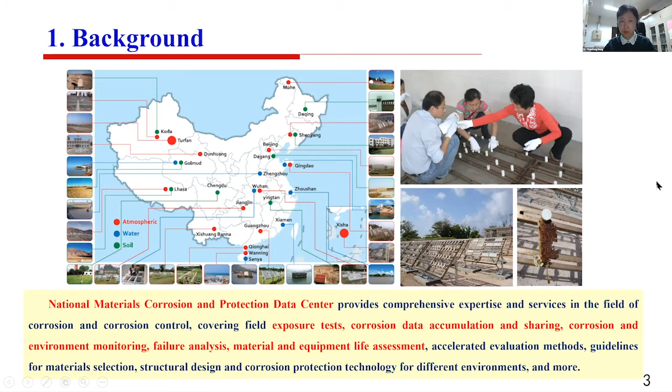Most of our work involves outdoor exposure, so you can see the specimens for the atmospheric corrosion test, and we also use different kinds of samples to do accelerated corrosion tests in the laboratory. That is the background.

Within the recent 10 years, we know there are various types of corrosion. The reaction process may cover different scales, including length scale and time scale. So we need to focus not only on the corrosion experimental data, but also use more modern methods or other techniques to improve our study.

Based on the requirement and the multi-scale challenge, I think we need to lead our group to focus on integrated computational corrosion. That's why I've spent about 10 years focusing on this area. The key issue is that we need to exchange, integrate, and evaluate the correlation and validity between the experimental and computational data - this is very important.

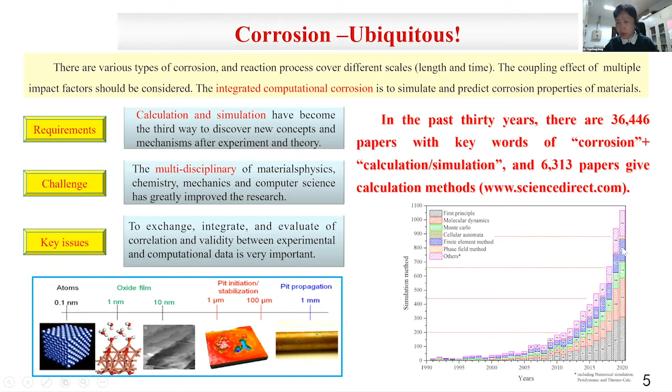From this figure, you can see the increasing number of papers very clearly. That's why we chose this method.

Another background is that from the physics or chemistry field, we wanted to use new methods for our study. That's why we tried to create a knowledge map of the mechanisms and different simulation methods. From this map, we can see some hot point issues in corrosion.

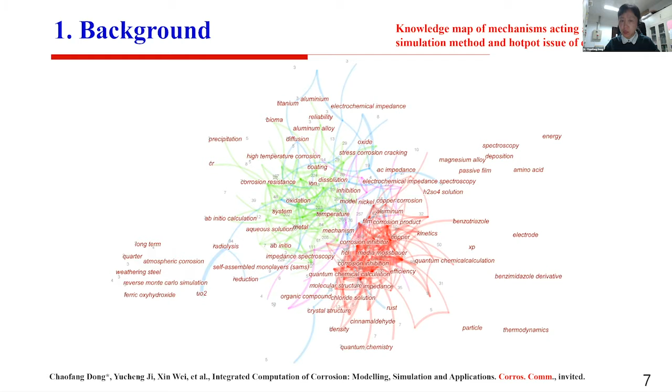The red one is about corrosion inhibitors, the green one is focused on oxidation, the blue one is about atmospheric corrosion, and others relate to electrochemical impedance. From the knowledge map, we can understand the relationships, and it's easy for us to identify which area is a very hot topic.

In recent years, everyone knows that in the US, material genome is very important in material science and engineering. In China, we call this material genome engineering.

Based on this background, we think we need to focus on building multi-source data. For example, we need to use the mechanic data, the electrochemical data, also the microstructure. We need to try to put all the data together to make a decision, or analyze all the data related to the performance. That's why it's very important, rather than relying on a very small amount of data samples for the conclusion. That is one change in material research and development by the MGE method.

Another one is about the data of the material structure and properties that need to be screened and modeled with the help of computers. I just put two Nature papers on this slide. You can see one is about sharing data in materials science, and another one published by Professor Li, called that we need to share corrosion data. So after that, if all of us can share our data together, maybe we can find some new mechanism.

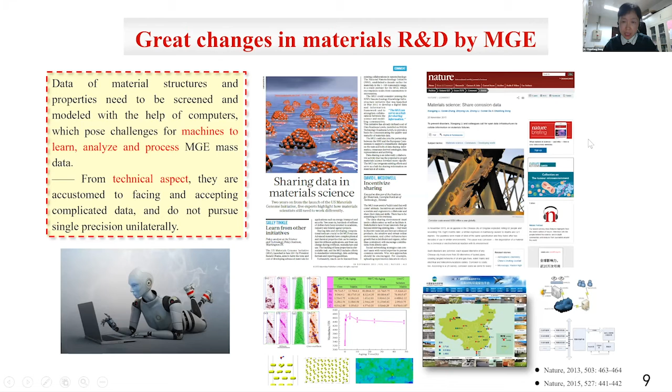So the third one is about the experimental tools for the automatic in situ method, and also some computational tools for the multi-scale modeling and the data analysis tools, which are very important parts for the MGE study.

Based on this, I think, what can calculation do for corrosion? Maybe we need to look from the thermodynamic, and also dynamic, and the electronic aspects, from these three parts, maybe we can know something new, by the meaning of the integrated computational corrosion.

I think maybe the cross scale, the generate additional information and experience lead to the model change from the known to unknown. Maybe the creative and new things are very important for the corrosion mechanism.

And with the tendency, we need to use new computer techniques, for example, self-learning and optimizing for the corrosion resistance.

And the key point is we need to use some committee to get the standard. After this standard, we can share the data. Without that, it's very hard to do.

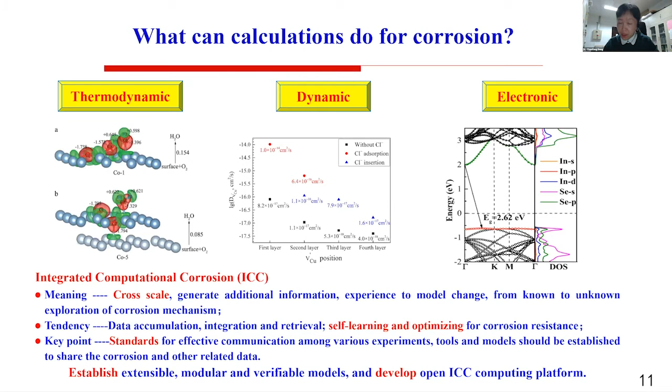After that, we want to establish extensible, modular and verifiable models to develop an open integrated computational corrosion platform.

Based on this, because of the time limitation, I want to show some examples of our work. If you want to know more in detail, we can use email, or after this conference, we can use something like Skype to communicate more.

So the second part is about integrated computational corrosion. The first one is about using DFT calculation to get the Pourbaix diagram. From the reference, the Pourbaix diagram can be calculated by different kinds of software, for example, the Materials Project, Thermo-Calc, and also pymatgen.

We also know many groups doing work in this area, for example, Dr. Huang Liangfeng and the group of Professor Scully, who also do very good work on this part.

In our group, we want to use Python software to face the challenge. One is the binary and ternary alloy system, and we want to use the method to calculate some complex solution systems. So how to get very fast and efficient results? That is what our work wants to serve.

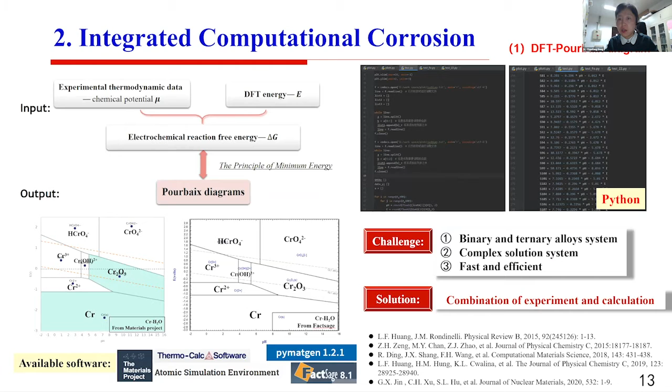With this basis, we also made our software. You can see on the right hand the Python code, and after that we just follow several steps. The first one is the chemical potential of the solid phase, and we also use different experimental chemical potentials combined with calculation results. That's why we can solve some very complex systems.

So the chemical potential of the aqueous ions from the experimental chemical potentials, we use this equation, and after that we also try to write down all the equations and reactions during this system to use DFT to do the calculation. The results show we can do the ions, chloride, and H2O system. So that is a new aspect in our group.

So this is from the thermodynamic method. The second one is about passive film stability. This one is guided by Professor Digby Macdonald. So first, we use the electrochemical test and also use the PDM model to do a lot of analysis based on the experimental results.

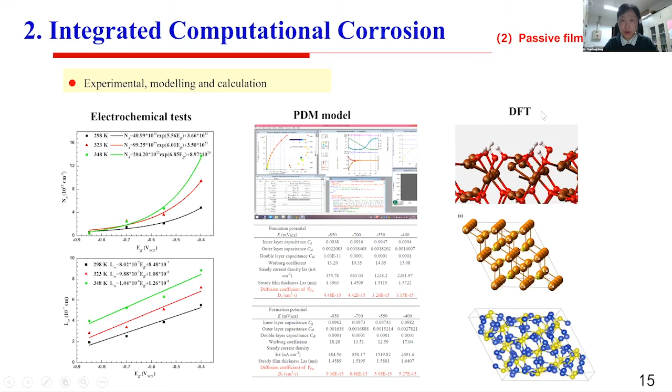After that, we established several kinds of passive film models with the point defect inside it. After that, we can get the corrosion resistance and the changing of the film formation stability. We also focus on the different kinds of semiconductive character.

From the table, we know the diffusion coefficient from the electrochemical method, this list is from the PDM model, and this one is from first principles calculation. The results show very good consistency with the diffusion coefficient of the copper vacancy being in the range of 10 to minus 15 to 10 to minus 14th power. That is very good for our experimental temperature in this system.

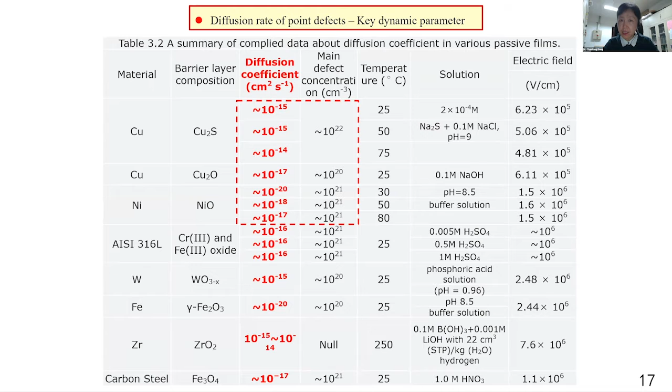We also published a paper in Corrosion Science, and after that we tried to use this method to calculate different kinds of passive films. In the various passive films, the diffusion coefficient changed greatly, so we can use the diffusion rate of the point defect as the key dynamic parameter.

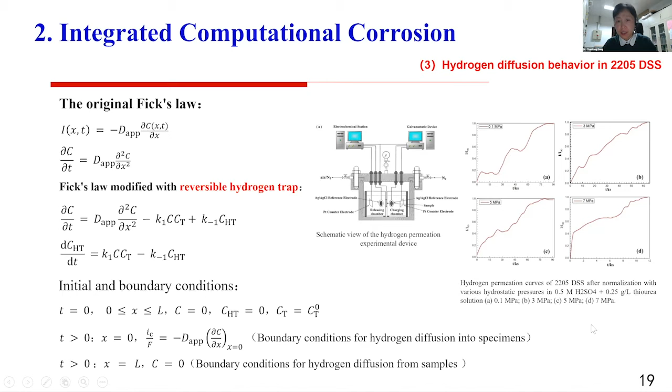This task belongs to work done with Professor Macdonald and Professor Mirna. We try to use the original Fick's laws to establish this equation, and also use the reversible hydrogen trap to modify these laws.

After that, we do a lot of tests with the parameters and the result of the hydrogen permeation, this is from the experiment. Then we use the COMSOL software to establish and simulate hydrogen diffusion inside the stainless steel. After that we can get different kinds of boundaries to determine the hydrogen concentration distribution with respect to time along the thickness of the samples.

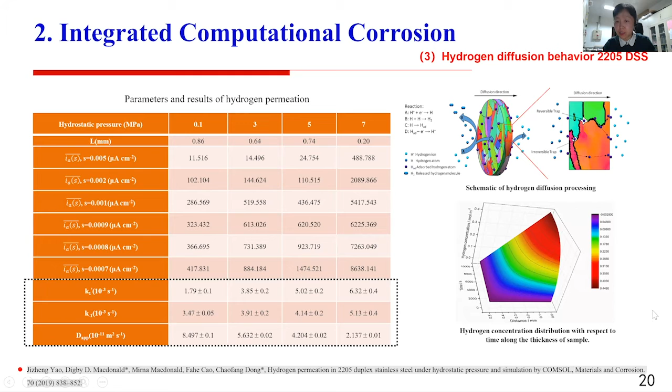For the time limitation, this part is just very fast to get through.

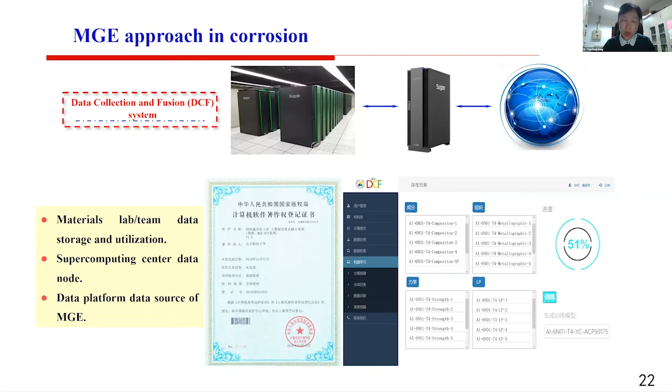Within the recent 5 years, we already used a lot of the supercomputation center, and we also set up the software. Sorry for the conference time constraints.

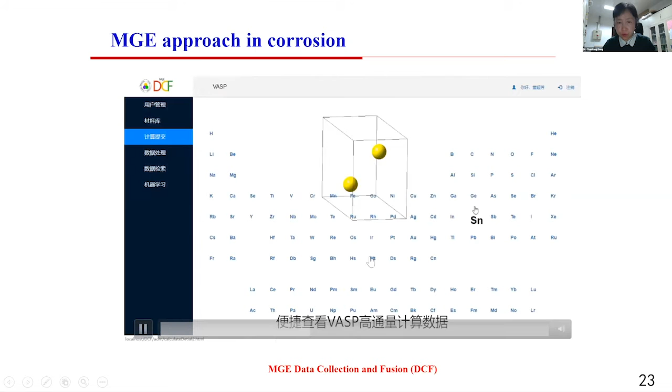We didn't change the software into the English version, maybe next time. We also calculate all the elements in the tables, and within the database we give a lot of details for different kinds of materials. Within this system, we give the calculation data for mechanics, microstructure, electrochemical properties, and some machine learning methods are also within this software.

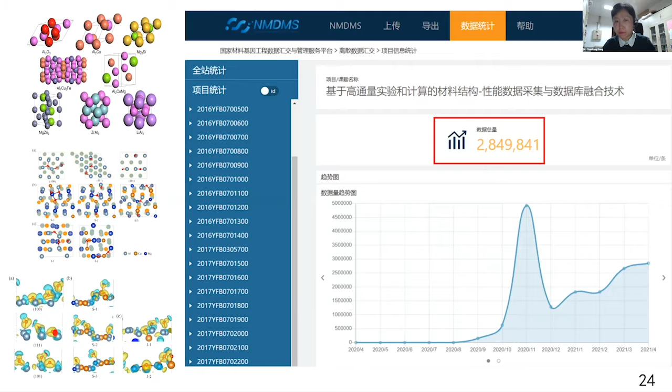You can just submit your POSCAR and your POSCAR file, and you can get some estimation. So we already have 2 million data points in this system, and maybe after this we can use some machine learning or other computer tools to get more results.

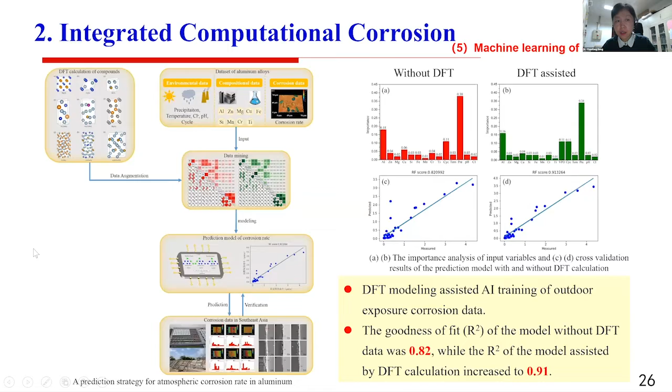For example, the aluminum alloy, there are maybe 2000, 5000, 6000 and 7000 series. We can use the calculation as input and get very good results. The error between the predicted and experimental corrosion rate of the aluminum alloy in Southeast Asia is less than 15%, so that can be used.

And the third part, 3 minutes.

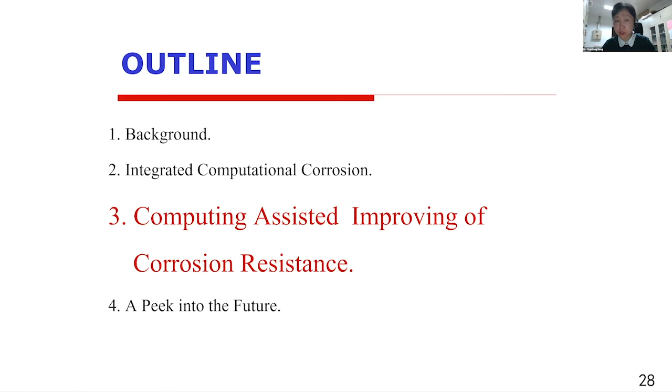So for other speakers already mentioned about the inhibitor, so this one just uses the calculation and also the thermodynamic, also some molecular dynamics, and we use the experimental to verify our result. So that follows about all the MGE.

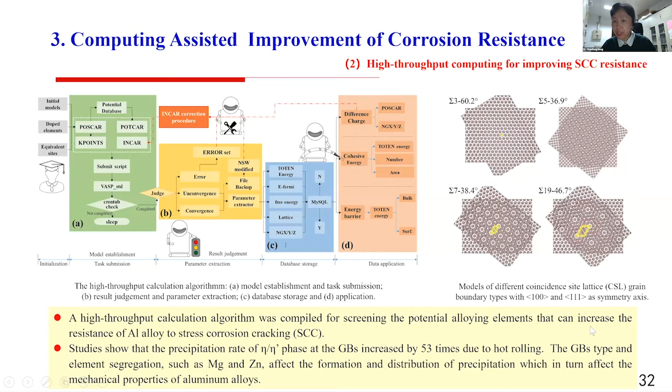This one is about the high throughput calculation. We just use it to screen the potential alloy elements that can increase the resistance for the stress corrosion cracking.

This one is about the different kinds of dislocation moving, so we can investigate the grain boundary and also the segregation. For example, the eta and eta prime phase precipitate and the grain boundary, the dislocation pinning effect of the grain boundary is no longer observed, and also the strength of the grain boundary changes a lot with the interaction of the hydrogen atoms, everything changed.

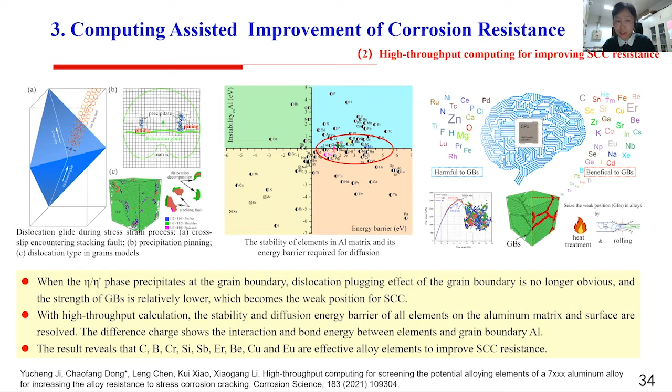If you want more details, you can see our papers on the corrosion science.

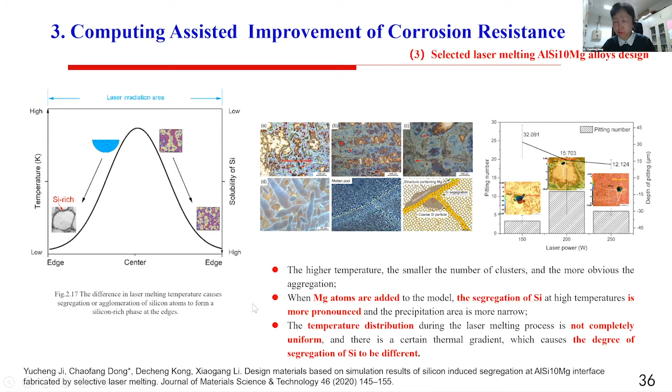So this is about the selective laser melting design. For all parts of the result calculation, we use the experiment to verify whether it is true or false.

The last part is a peek into the future. So this is our part from the atomic simulation to the engineering part, from the calculation line, and also we use experimental work to do the verification.

This is a different challenge, and we want to use different kinds of solutions. And now we are looking for cooperation.

The first one is about the Pourbaix diagram. We want to use Professor Digby's kinetic stability diagram to do the modification.

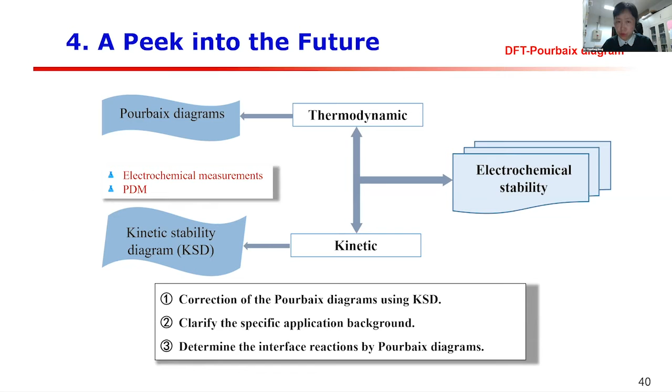And the second part we look for cooperation is about the reactive molecular dynamics. We need the force field of the aluminum, carbon, hydrogen, oxide, and chloride.

So in the future, if you're interested in this field, we can make more communication.

So the question is very, very challenging. So it's very complex and very cool.

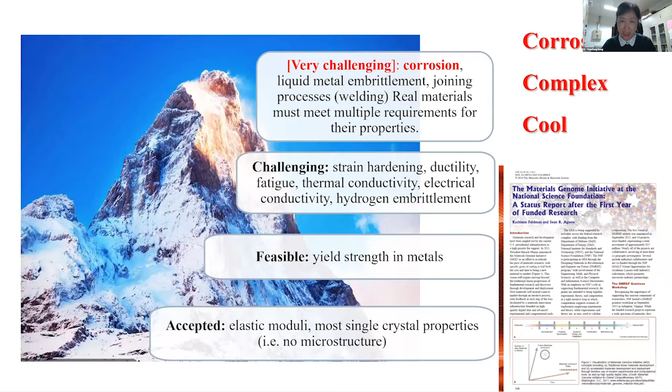Thank you very much for the excellent presentation. Because of the time, I just have one quick question. Is there a standard or guideline for effective application of integrated computational corrosion analysis?

Thank you, Professor Dong. Can you recommend any book or guideline for researchers to get used to your research method in terms of corrosion computation?

Now, most of us use the book from the ICME that belongs to the MGI program. So maybe in corrosion, we want to just organize a group. We can make our own books, but the standard is very challenging.

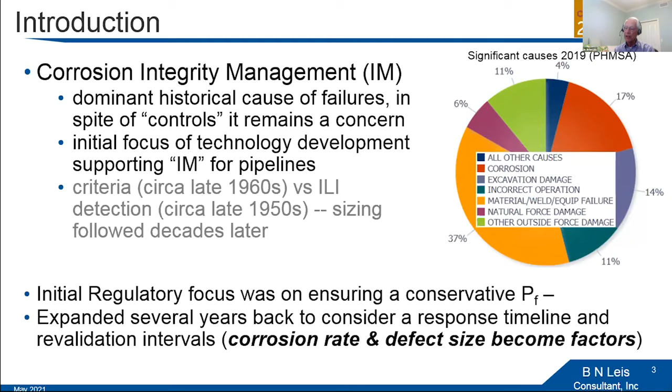Not surprisingly, corrosion initially was the major cause of failure, and it was the initial focus of technology development for integrity management for pipelines. The initial regulatory focus was on ensuring a conservative failure pressure, and recently that was extended to consider response time and revalidation intervals, which opened concern for corrosion rate and defect size.

By way of explanation for why these regulatory drivers cause problems, consider that the failure pressure is a function of a constant, basically the reference stress in the pipe geometry, and the effect of the defect. If you change one side of this equation, you have a corresponding effect on the other. Historically, by making things conservative, the bottom line was that decreasing the failure pressure through conservatism effectively decreases the defect's length. But once you consider the influence of defect length, a shorter defect length gives rise to a longer life. So you really have to have these two parameters in balance. We need to keep the failure pressure and the defect size in balance, and that demands a very accurate solution. You can see that in the context of the chart here. This data point represents a point.

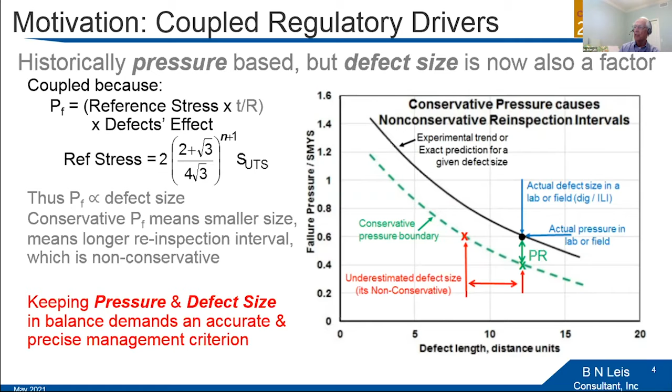If I reduce the pressure by the amount indicated and then track up the green dash line, you see that I'm substantially shorter in terms of the defect length. So there's a clear concern in this context for that influence. I want to point out that I'm using a reference stress here that's a function of the UTS and the strain hardening exponent, which has a theoretical foundation in power law plasticity for those that are interested.

Talk briefly now in terms of cost, safety, and conservatism. I'll note that any conservatism introduced to offset model error, which is why it was initially introduced, does not really add any safety or reduce risk. It simply offsets the model error. So the costs associated with model error management can be removed without altering, much less jeopardizing, the safety of the system. The key cost management driver here is an accurate, precise solution that eliminates the need for conservatism. The bottom line from the prior chart was that you could not apply a margin of safety prior to doing the analysis, but if the analysis is done correctly, you can add that margin of safety afterwards. The objective of our work has been the development of accurate, precise, mechanics science-based models of failure pressure to end the money wasted on offsetting model error.

I'll talk briefly now about level 1 assessment criteria, focusing particularly on issues later in the context of idealized versus real corrosion, isolated corrosion versus complex corrosion, and detection and sizing. Throughout our work, the premise has been that if a criterion is inaccurate for an idealized isolated feature under well-controlled testing, then such criteria don't provide a sound basis for technology development. That's really been fundamental to our path forward.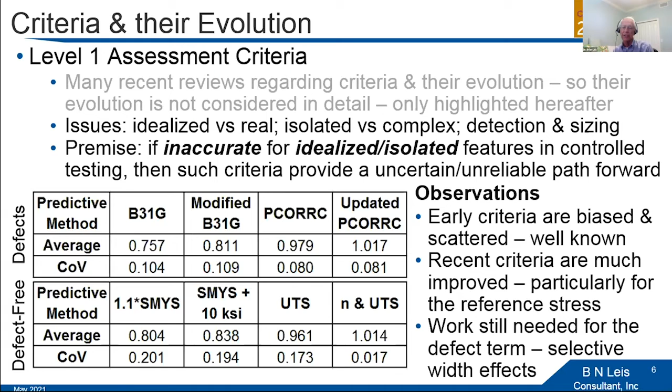If we turn our attention now to defect-free pipe, remembering that the failure pressure is a function of the pressure of failure of the defect-free pipe, coupled with the effects of the defect, it becomes apparent that for these early criteria, much of the bias evident here is a consequence of the bias present in the reference stress. In comparison, if you look at the more recent criteria, you see that the bias is much reduced, and the scatter is significantly reduced when we use a failure criterion for the reference pipe that's a function of the UTS and the strain hardening exponent. So the observations are as noted here: the early criteria were scattered, that's well known, and the recent criteria are much improved. But if we dig into the details, we quickly see that there's work still needed in terms of the defect term, particularly in regard to selective width effects.

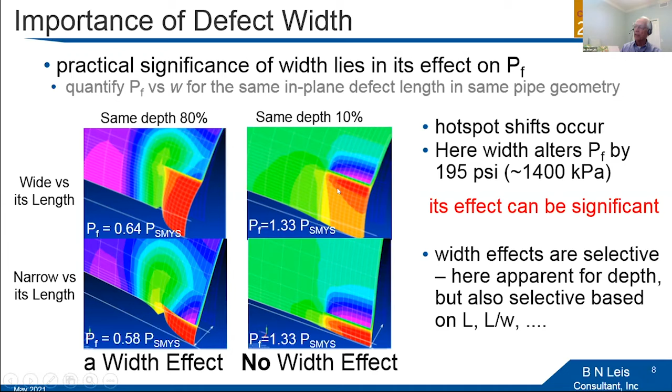It has a significant effect. The width effect is a function of depth, but the width influence is selective in regard to the length — selective in regard to the aspect ratio, that is, length to width, and other parameters. So width can be a very complicating factor, and unraveling why turns out to be relatively simple if we contrast two scenarios: wide and deep versus wide and shallow.

You see here a relatively gradual transition through the full wall into the part wall of the pipe. Whereas here you see a very significant transition, a very sharp change across that interface — coupling bending and membrane tension here, where it's largely membrane tension there. That's why width is a factor. Historically we've ignored it, but as you can see, width was a significant influence, and next generation criteria will explicitly embed width effects as we move forward.

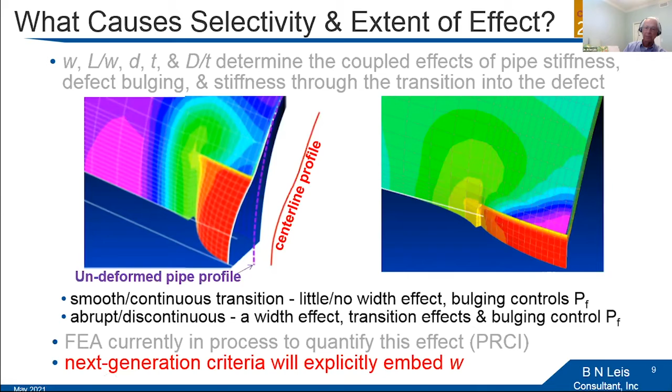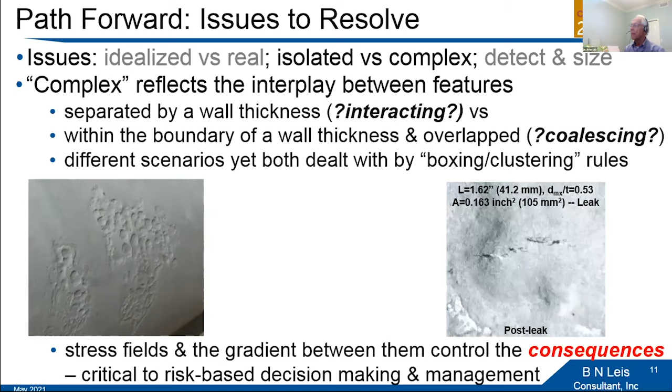I'm adding two plots or charts to this, which show a feature very similar to what you see in this image here, where we have overlapped pits - here's a pit and here's a pit. These are really pits within pits. You see a lot of little pits here. These pits are growing by virtue of smaller ones giving rise to a bigger one. This is not quite a full wall thickness - it's a significant barrier, if you will, between this feature and this feature coalescing or failing in a shared way.

Notice here that the maximum depth, in this case, is 0.53. The same is the case for this pair. In this particular case, this is a slightly shorter feature compared to this one. This is a view pre-rupture. As you can see here, leak paths have formed, and this is a post-leak image.

This combination leaked because the barrier between these two features was relatively shallow and they could coalesce. As they coalesce, they fail at a lower failure pressure. But because these two features are relatively resistant to failure, they don't coalesce, and they gave rise to rupture instead. So the significant difference here is a leak, which is a relatively small release through these very, very tiny cracks. Remember, this feature is just 2 inches long, or a little less than 2 inches long. So this is a critical element of the problem.

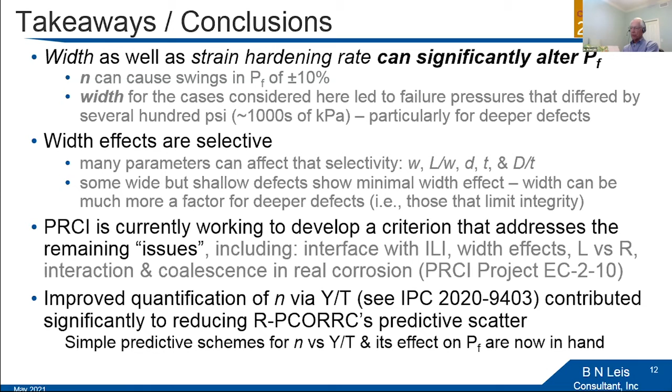And with that, Frank, I'll try and get you back on time. Thank you very much, Brian. That's a very good presentation. Right now I have two quick questions for you.

The first question is: what is the length-to-depth ratio to classify a defect as localized? That's a good question. The defects that tend to fail at the highest failure pressures tend to be small, physically small, and geometrically similar in shape. A relatively small pit can be very deep and still not fail, so the length-to-depth ratio in that context would be close to 1.

Another question: will temperature affect the pressure containment ability of pipelines? Most pipelines in service are buried, and they're moderated by the ground in terms of temperature, even though they've got a warm product flowing in them. Temperatures tend to be less than 140 degrees, more or less. Temperature is not a big factor under those circumstances. It does affect corrosion rate, obviously, but in terms of failure pressure and mechanical properties, it's not a big driver.

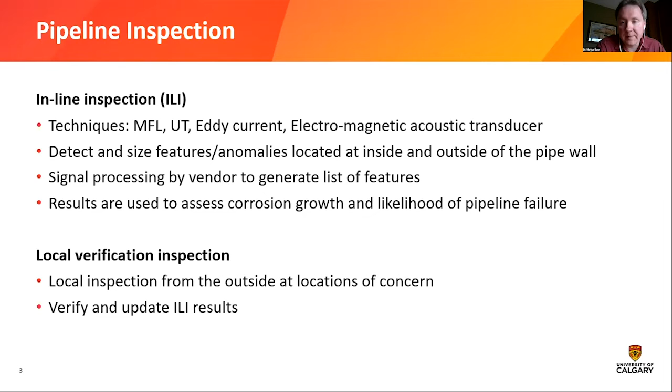So this is typically the starting point when we do the analytical integrity assessment, that we have these Excel tables available from the ILI vendors. Then every few years, as we do a new inspection, we get a new table. Based on this series of tables, defect matching needs to happen, and then we can infer what the corrosion growth is, and assess how critical the defects are.

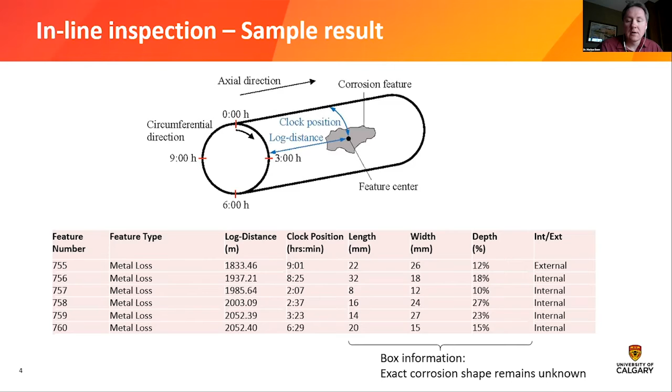So then based on this, we now need to go to the analytical assessment, where we have two things to do. One is we need to do the corrosion growth analysis. So we need to assess what is the current corrosion size, what will be the future corrosion size, and then assess how critical the defects are, or when do they become critical. How much time do we have to follow up in terms of inspections and or repairs?

In this feature assessment, we have different ways of doing this. As we saw earlier, the level 1 assessment is some sort of deterministic or code-based. It is usually based on conservative values, and it just gives you a yes or no answer. Is the defect acceptable? We can still leave it in. We don't need a repair. Or it is very close to being critical, so we have to follow up. That is one method where we're not really directly addressing the uncertainties.

Now, if we want to do a step better, we can do it reliability-based. So for each defect, and then for entire pipeline sections, we determine the probability of failure. So now we're going away from a deterministic analysis, or an analysis where we use fixed numbers, to more like a probabilistic analysis, where we really want to describe explicitly what are the uncertainties. Then we use the failure probability and compare it with a target failure probability. And as long as we stay below, we say the defect is acceptable. If that's not the case, then we have to follow up.

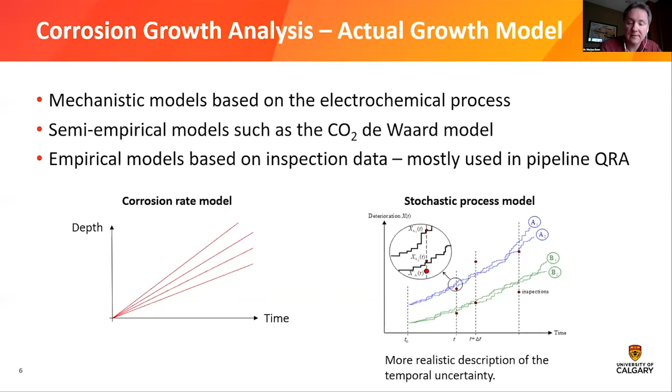And then we have uncertainty due to inspection errors or measurement errors. There we have several types that are already built into that list of defects we obtain from the ILI vendor.

We can have detection errors. Out of all the defects in a pipeline, not all of them are detected. To describe that probabilistically, we use a so-called POD, probability of detection curve. As a defect gets larger, the probability of detection is very high, so there's a high chance we will actually capture those. Usually POD is very low for defects that are very small. That's relatively good for us because the smaller ones we are not as worried about from an integrity perspective.

So we have to keep in mind the list of defects we have is not complete. We're still missing some that are not included.

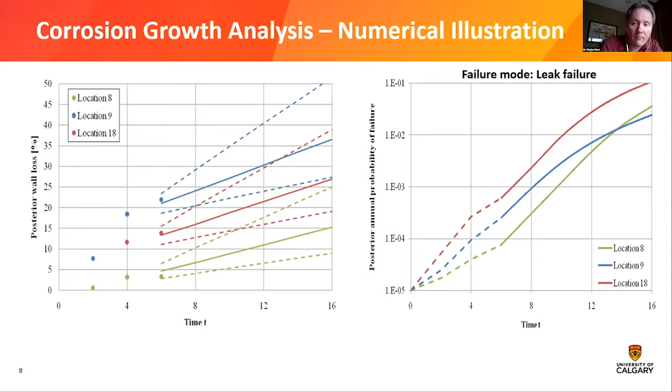Markus, you have almost 2 minutes. That's good, I have 2 slides.

The previous slide showed the reliability-based version. We can do something similar, risk-based, and use that risk in a life cycle analysis, or even a little bit shorter than a life cycle analysis.

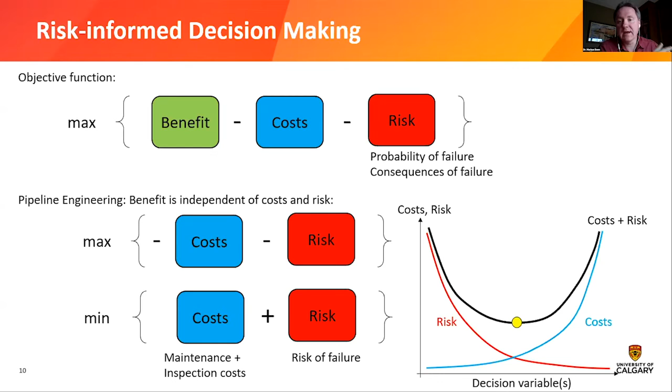Based on this point, we can make decisions in terms of when to go out and inspect again, where to make repairs, and if it is worth having follow-up inspections.

Conclusions. In general, from the industry, there's a clear trend towards quantitative risk assessment. The objective is to minimize the total life cycle costs from an operator perspective while still keeping the pipeline safe, which is often used to prioritize where to go out and make repairs.

Those defects that have higher risk, you prioritize first. Those that have lower risk come a little bit later.

When it comes to corrosion growth, it is typically or primarily inferred from ILI results. I wish there would be a stronger integration of advanced corrosion models, like mechanistic corrosion models, into the actual risk assessment. I've shown you some very basic examples, using relatively simple probabilistic models. We don't really consider the actual mechanism behind it. There's still a huge gap, and I hope in future we can close that.

From a temporal uncertainty perspective, we should avoid corrosion rate models, as they don't really accurately present the temporal growth over time. It is possible that the ILI-measured growth appears negative, due to the strong influence of measurement errors. That doesn't mean there's no growth; it just means the measurement error is so significant that there can still be a small, or even quite significant, positive corrosion growth of the actual defect.

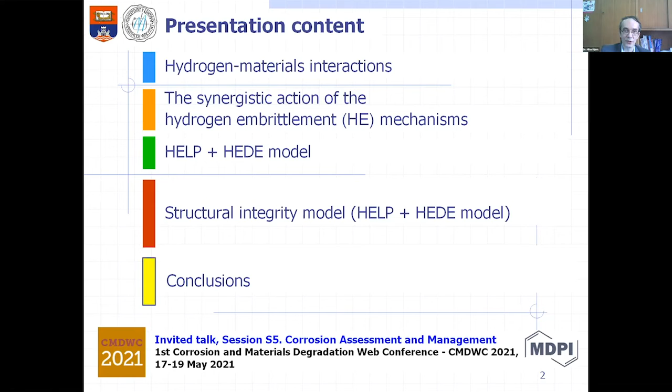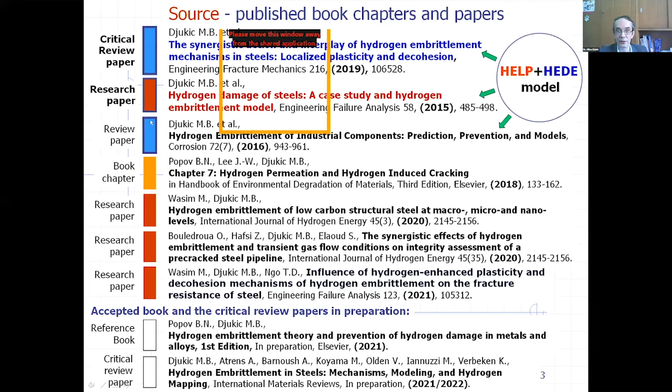Here are the sources and references related to this presentation. I wish to point out the book for Elsevier in preparation, to be published in 2021 together with Professor Branko Popov, about hydrogen embrittlement theory and prevention of hydrogen damage in metals and alloys. Also our future paper in International Materials Reviews with a group of top scientists related to hydrogen embrittlement, also in preparation, and 3 important papers related to the HELP plus HEDE model.

Hydrogen materials interaction is a complex term, but if we talk about preventive maintenance and maintenance engineering, they are mostly interested in hydrogen-assisted cracking. What is hydrogen-assisted cracking? It's hydrogen-assisted degradation of crack propagation resistance by assisting the microscopic process that constitutes crack tip advance. Due to the degradation of crack propagation resistance, the components finally fail. On the other hand, hydrogen embrittlement is restricted to the perception of the precise nature of hydrogen-assisted mechanical degradation, and we have various models on which the degradation of crack propagation due to hydrogen embrittlement exists.

In our recent review paper published in Engineering Fracture Mechanics, we proposed a 5-step approach in analysis of hydrogen materials interaction, which consists of phenomenological analysis of hydrogen-related degradation phenomena, and different experimental and modeling approaches in order to finally reveal the hydrogen embrittlement mechanism active in a particular material. Next is the analysis of hydrogen source and entry, where corrosion is the main process which provokes hydrogenation of material during the exploitation of various industrial components.

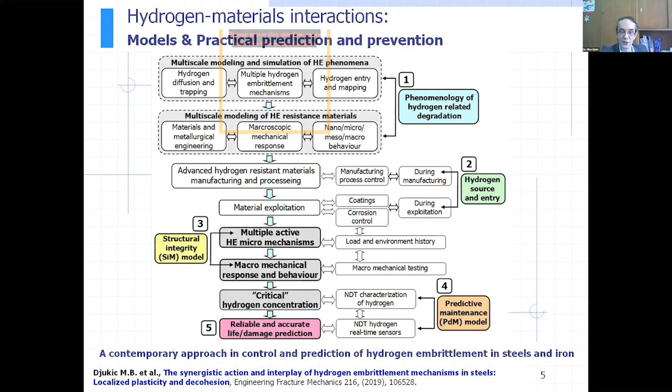Based on such analysis, we developed a structural integrity model based on the multiple active hydrogen embrittlement mechanisms active in steels and other materials, connected with the macro mechanical response and behavior upon reaching the critical hydrogen concentration in material. Future work will be focused on a predictive maintenance model based on NDT characterization in order to provide reliable and accurate life damage prediction of components exposed to hydrogen embrittlement in various industrial plants. So we have a missing link between numerous phenomenological research of hydrogen metal interaction and practical and predictive industrial models.

We could say that a fully developed and practically applicable predictive physical model still does not exist industrially for predicting and preventing hydrogen embrittlement. The synergistic action in the hydrogen embrittlement mechanism was recently divided into two major models.

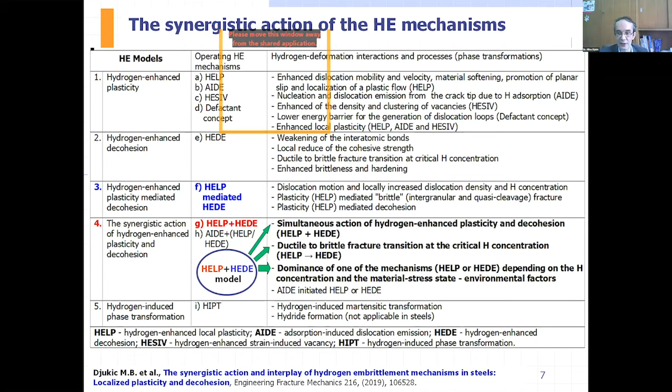The first is the HELP-mediated HEDE model, about the synergy of hydrogen-enhanced localized plasticity and hydrogen-enhanced decohesion mechanisms. Our model, HELP plus HEDE, proposed in 2014 and 2015, is now relatively well accepted. It indicates the dominance of one mechanism, HELP or HEDE, depends on hydrogen concentration, material-stress state, and other numerous environmental factors for practical application.

In 2009, Professor Robertson and a group of authors from the United States pointed out that it's more feasible that in metals several hydrogen embrittlement mechanisms operate simultaneously, but one of them dominates under specific conditions. Recently, in 2021, the synergistic interplay of both HELP and HEDE mechanisms in different types of steels was confirmed by numerous experimental and modeling evidence.

We could summarize that the dominance of these two mostly accepted mechanisms depends on numerous factors. I will just list the problem. We have numerous influencing factors like steel microstructure, source of hydrogen, hydrogen local distribution and trapping processes, also the local hydrogen concentration and distribution, and reaching of the critical hydrogen concentration.

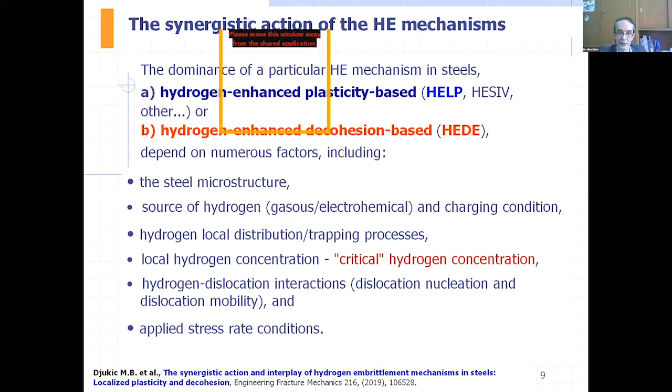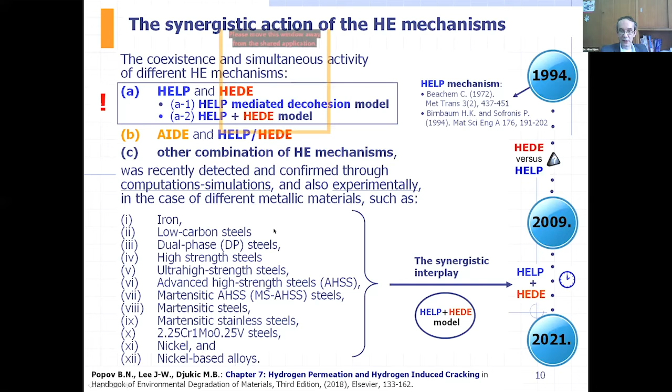Now I will talk about the difference between these two models for the synergistic action of HELP and HEDE mechanisms: the HELP-mediated decohesion model, and the HELP plus HEDE model.

And we have here numerous papers, up to today, which confirm the synergistic action of HELP and HEDE mechanisms in steels, but also in other materials. So here is the definition from 2014, which we further developed in 2015, 2016, and 2019.

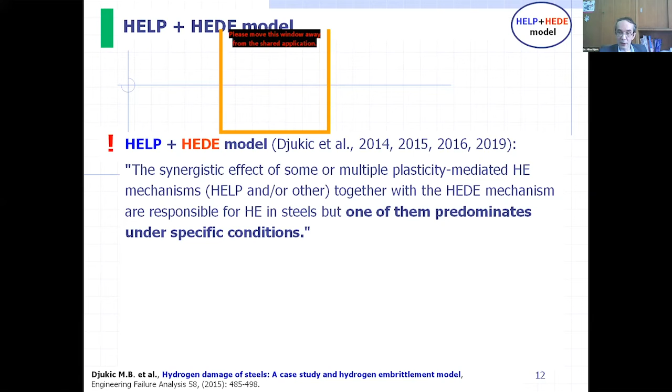The HELP plus HEDE model: the synergistic effect of some or multiple plasticity-mediated hydrogen embrittlement mechanisms, HELP or others, together with the HEDE mechanism, are responsible for hydrogen embrittlement in steels, but one of them predominates under specific conditions.

You can see here the difference: the HELP-mediated decohesion model states that the major mechanism always active is the HELP mechanism, and that initial activity of HELP is always a prerequisite for the eventual activation of the HEDE mechanism. That's the HELP-mediated decohesion model, while in contrast, the HELP plus HEDE model indicates that these two hydrogen embrittlement mechanisms operate almost simultaneously.

Some plasticity-mediated mechanism, most probably HELP, but also AIDE or HESIV, together with the HEDE mechanism, but one of them predominates under specific conditions. That is the most important distinction between these two models for synergistic action.

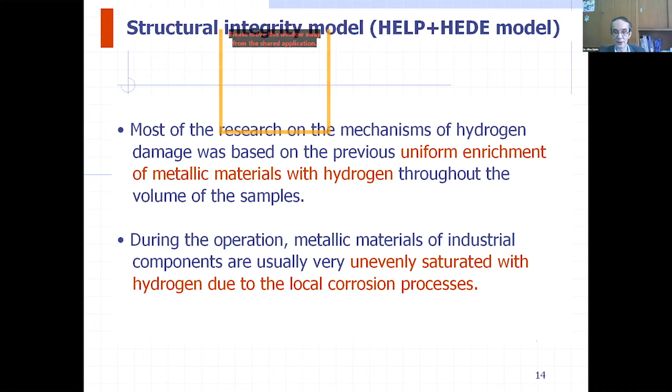When we talk about structural integrity models, these two points are extremely important. Most research on the mechanisms of hydrogen damage and embrittlement was based on previous uniform enrichment of metallic materials with hydrogen throughout the whole volume of the samples. Contrary to this, during operation, metallic materials of industrial components are usually very unevenly saturated with hydrogen due to local corrosion processes.

The prerequisite for the predominance of the HEDE mechanism and its activation, which leads to hydrogen-assisted degradation of crack propagation resistance, the most important thing for practical preventive maintenance aspects, is reaching the critical hydrogen concentration. Upon reaching critical hydrogen concentration, we have a sharp transition from HELP dominance at lower hydrogen concentration to HEDE dominance, and also a very sharp drop in some micro and nanomechanical properties.

The most affected properties are ductility, plasticity, and crack propagation resistance, which we investigate as a crack propagation component of impact strength during Charpy testing, which shows a sharp drop upon reaching the critical hydrogen concentration. We also see a very sharp ductile-to-brittle fracture transition due to reaching critical hydrogen concentration, so failure occurs after the degradation of micro and nanomechanical properties.

Also, we investigate nanoelastic modulus and nano-hardness change due to activation of the HELP mechanism, according to our HELP plus HEDE model in the recent papers.

The structural integrity model was based on a real-life industrial case. We have hydrogen damage due to high temperature hydrogen attack, and after that, uneven saturation with hydrogen during operation, which provided opportunities for viable hydrogen embrittlement analysis and confirmation of the HELP plus HEDE model.

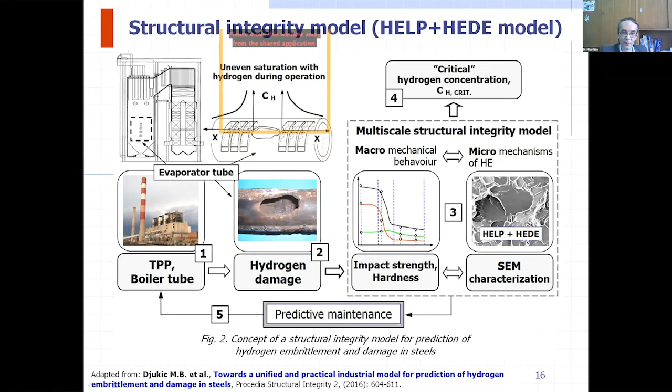We provide the connection between macromechanical properties and micromechanisms. Impact strength and hardness, we connect with the characterization of fracture surfaces in order to reveal the critical hydrogen concentration phenomena and to provide a reliable structural integrity model for the preventive and predictive maintenance of industrial components.

We investigate typical ferritic-pearlitic, low carbon St.20 steel, equivalent to 1020 steel. We use a non-standard subsized Charpy geometry, Charpy V-notch specimen, as a subsized specimen in order to provide a specimen from the tube wall.

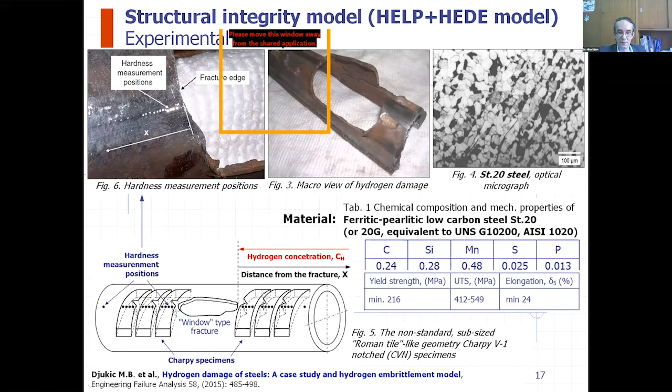Uneven saturation with hydrogen was due to local acidic corrosion, which was the source of hydrogen and provoked corrosion gouging. As you can see here, that gouging was mainly provoked by chlorine, with simultaneous action of electrochemical galvanic corrosion due to copper in the presence of organic matter in the boiler tube. Just briefly, we investigate the corrosion mechanism.

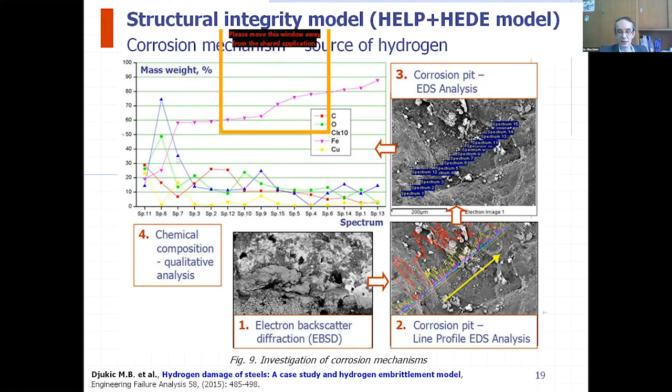In the corrosion pits, we investigate the chemical composition of corrosion products. You can see here the EDS line profile analysis and EDS points for investigation. We can see that locally we have very high copper and very high chlorine content, which provoked the corrosion mechanism that was the source of hydrogenation of the material during exploitation.

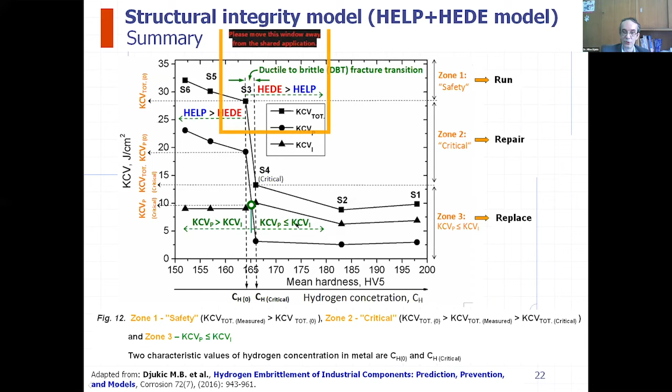The repair area corresponds to reaching the critical hydrogen concentration and the sharp drop of total impact strength and crack propagation component of impact strength, which then becomes lower than the crack initiation component. This presents zone 3, connected with the immediate replace decision of the components, since the crack propagation component is lower than the crack initiation component, and failure due to hydrogen could occur very easily and very frequently.

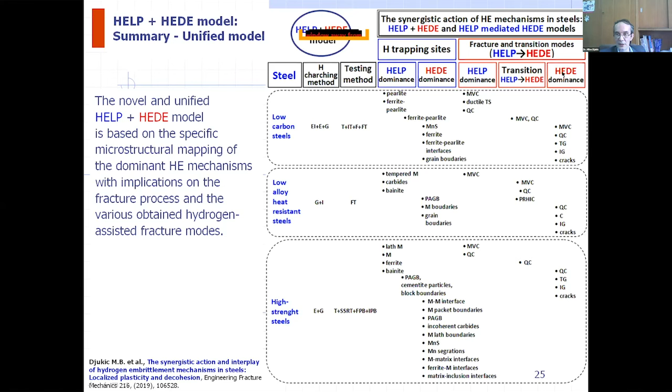We listed here the hydrogen trapping sites responsible for HELP dominance and for HEDE dominance, and also the corresponding fracture modes and transition modes, related to the dominance of the HELP mechanism and the transition from HELP to HEDE dominance, and finally HEDE dominance, for different types of steels.

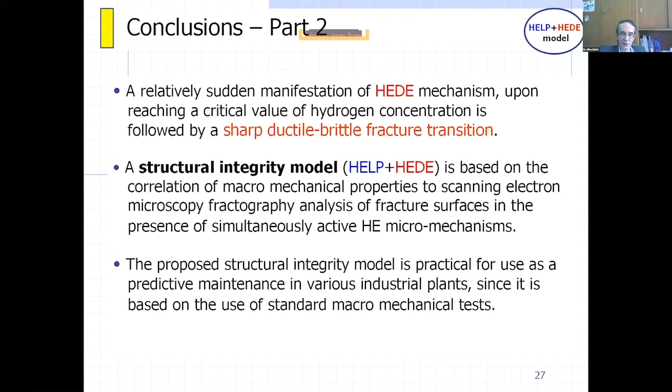Finally, the proposed structural integrity model is practical for use as predictive maintenance in various industrial plants, since it is based on the use of standard macro mechanical tests.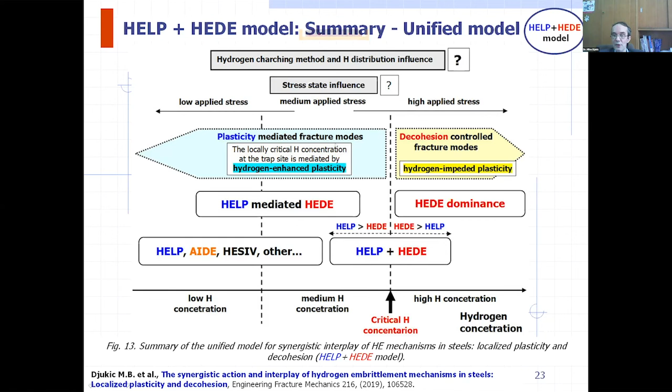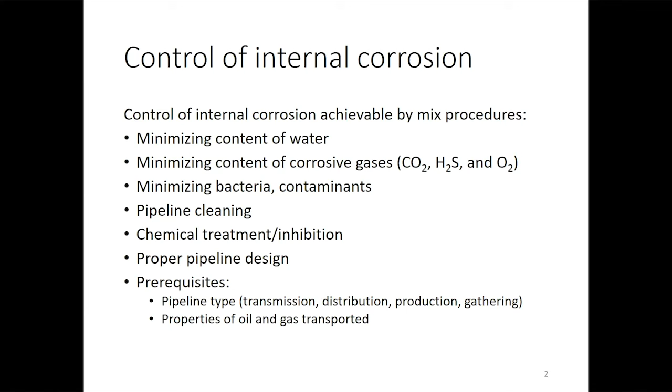The prerequisites in devising a method are, first, determining the type of pipeline, whether transmission, distribution, production, or gathering, and also the physical or chemical properties of the oil and gas being delivered.

For the methods, there are mainly five basic methods applied nowadays: dealing with gas phase contaminants and degasification, water control and dehydration or dewatering, pipe cleaning and pigging, internal coating and liners, and chemical treatments or corrosion inhibitors. These methods haven't changed much over the years, except for minor changes or strategies that make them more efficient in controlling corrosion.

For considerations in a liquid pipeline, it first has to be identified as a field gathering pipeline with multi-phase constituents, a crude pipeline, or refined product lines for gasoline, diesel, lubricant, LPG, NGL, etc. These basic considerations determine which category a pipeline falls into for a corrosion control strategy or method.

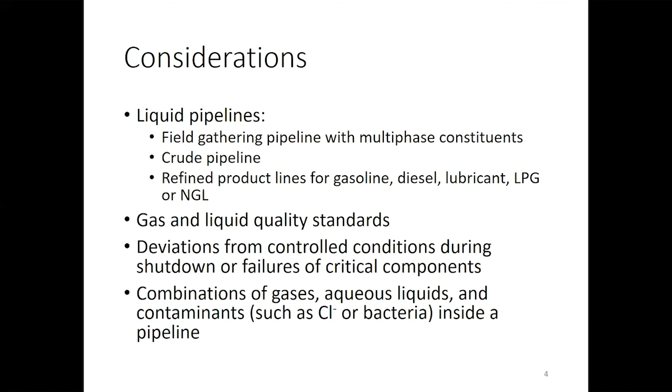Also, combinations of gases, aqueous liquids, or contaminants such as chloride or bacteria in pipelines could change the method decided on for controlling or mitigating corrosion, and for a pipeline's specific critical locations where corrosion is expected to be high.

As I said earlier, for environmental control, we consider the amounts or concentrations of carbon dioxide, H2S, or oxygen, which must be limited. The constituents of water in a pipeline should be removed, of course, by dehydration.

We also determine the effects of the extent of expected damage from CO2 in soft waters condensed from steam. CO2 creates corrosive conditions through carbonic acid and reduced pH, which drive and accelerate the cathodic reactions. Carbon dioxide increases acidity and drives the formation of carbon-based corrosion scales that, with time, reduce corrosion, but initially cause damage and accelerate the anodic reactions.

In hard waters, carbonate and bicarbonate also get involved in the anodic reactions in addition to the cathodic reactions, and with magnesium or calcium, they act as complexing agents that can also get involved in the formation of protective scales that reduce the anodic reactions over time.

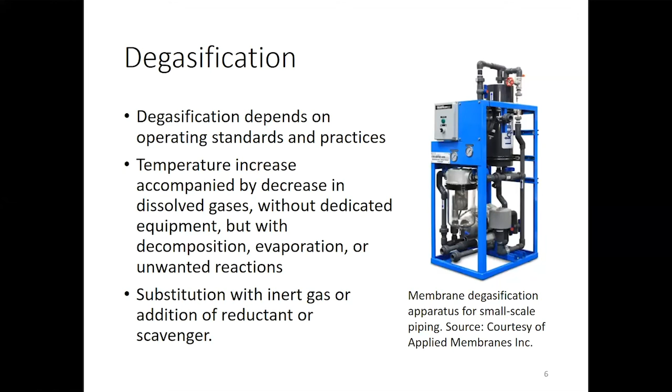Water cuts could be very high in multi-phase flows, especially in the initial stages of the piping system, in the gathering lines, and could be limited in the product lines. Crudes in general could contain as much as 2% water, but this greatly influences the mechanism and likelihood of internal corrosion, and also changes the entrainment and flow regimes, dictating the mitigation strategies. Removal of water from pipelines is necessary, but complete removal of water is impractical.

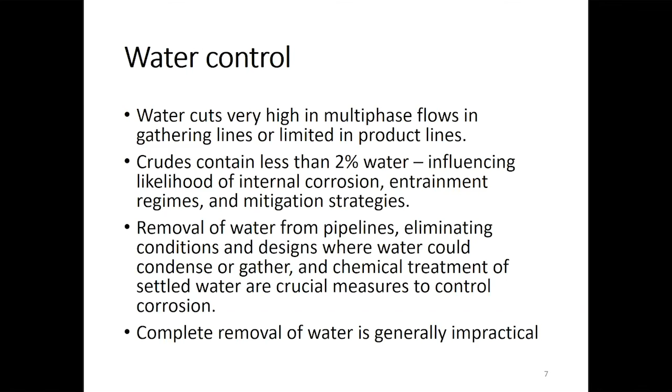Water vapor in aqueous systems adsorbs to the surface at low humidity, but causes trivial corrosion rates, as electrochemical reactions couldn't be supported by vapor alone. This is related to dew points. With glycol dehydration, the dew point decreases as water vapor is removed from the gas at the interface with local glycol water solutions.

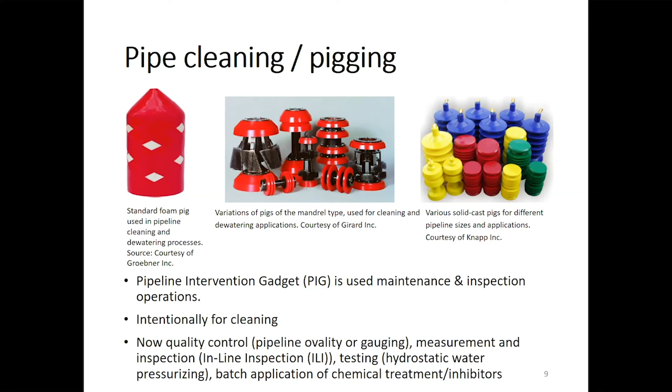For internal coatings and liners, they in fact are very good in mitigating corrosion, and they prevent precipitation of corrosion products, and they improve flow efficiency. They have good cost capabilities, cost effective. They are a cost effective method in reducing, in driving and pushing the flow and reducing maintenance costs.

They cannot substitute inhibitors, and they are prone to defects and disbondment, and they are also prone to hydrogen-based attacks. They also often make inspection with pigs or smart pigs challenging. So in some sense they improve flow efficiency and reduce maintenance costs, but they cannot prevent corrosion, or they could be a source of other problems.

For the chemical treatments and inhibitors— one minute, please, can you just speed up? Yeah, absolutely.

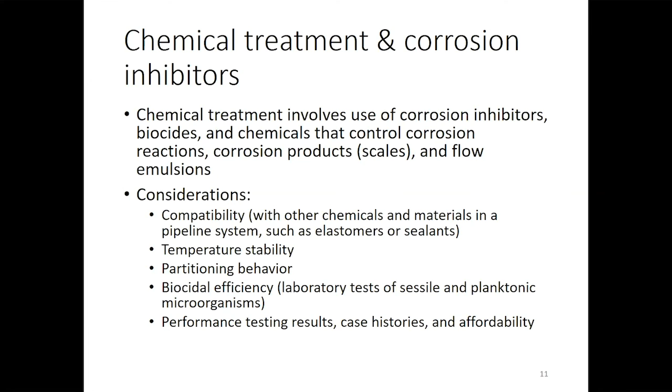For the inhibitors, they have to have compatibility, temperature stability, good partitioning behavior, and they must have performance testing results. Mechanistically, inhibitors reduce corrosion rates, and they reach and adsorb on the metal surface, and they increase the resistance of corrosion products.

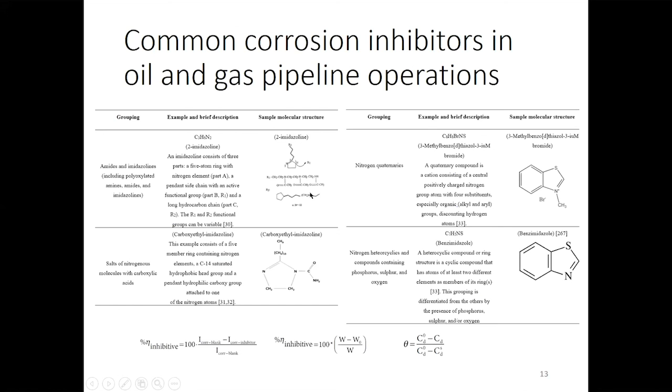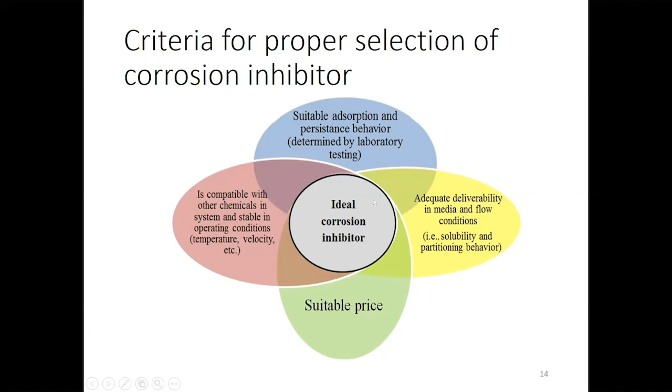There are a variety of types of inhibitors, and according to the type, they can control a variety of corrosion reactions in a pipeline. The criteria for an ideal corrosion inhibitor: they should be compatible with other chemicals and materials, have adequate deliverability, and stable adsorption and persistence.

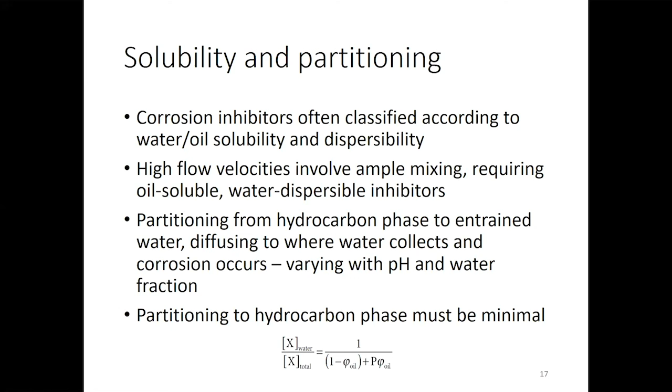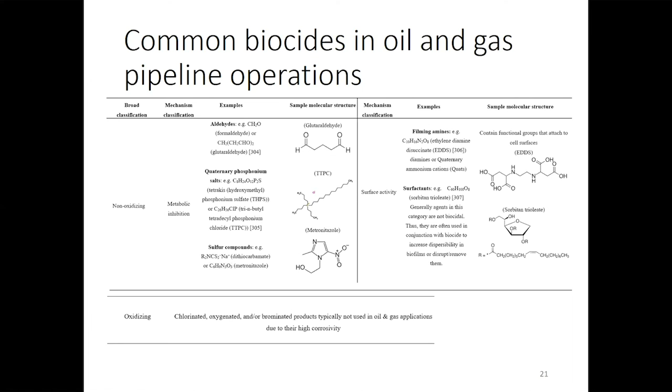Also, with microbiologically influenced corrosion, you can see that it's still a source of a variety of problems in pipelines, and for that biocides have been developed. There are a variety of types and categories devised to control microbiologically influenced corrosion, and biocide selection is not as easy as selecting an inhibitor.

Simulating corrosion conditions exactly from a pipeline is difficult, not as easy as it would be for inhibitors. So the role of the field and experience from the field is very important for selecting a biocide to control microbiologically influenced corrosion.

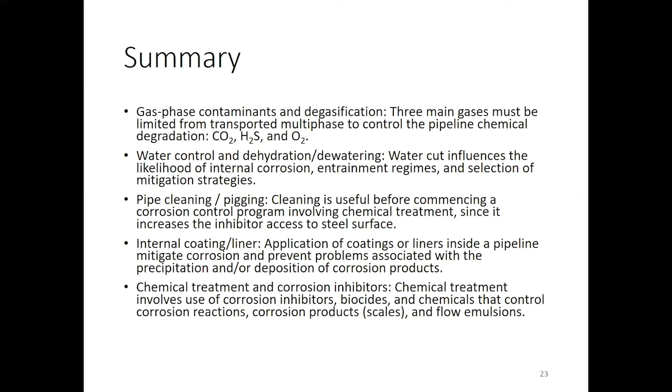In summary, any new or old method devised for controlling corrosion must focus on gas phase contaminants and degasification, must be based on water control and dehydration or dewatering, must also be based on regular cleaning and pigging for both cleaning and integrity measurements, must be based on the effective and cost-effective use of internal coatings or liners, and finally on suitable laboratory-based and field-based selection of chemical treatments and inhibitors.